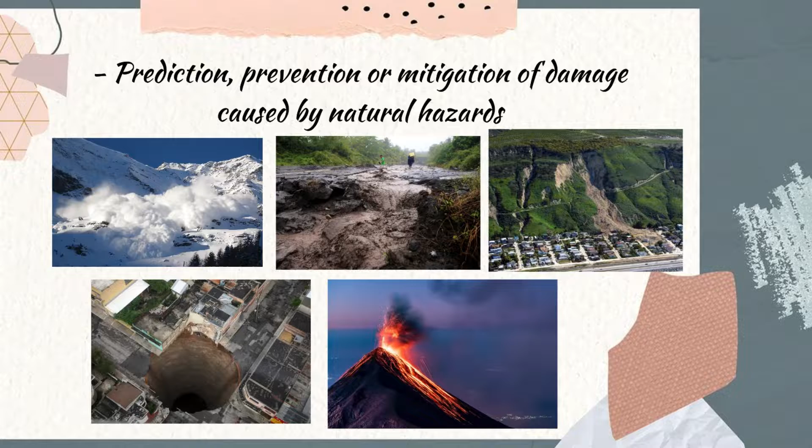Hi guys, my name is Aiman Haki, and in this video I would like to discuss the topic of geotechnics and transportation. Let's look at the definition of geotechnics. Geotechnics is the application of scientific methods and engineering principles to the acquisition, interpretation, and use of knowledge of materials of the Earth's crust for the solution of engineering problems and design of engineering works. It is the applied science of predicting the behavior of the Earth. Geotechnics embraces soil mechanics, rock mechanics, and aspects of geology, geophysics, hydrology, and related sciences. Example applications include prediction, prevention, or mitigation of damage caused by natural hazards such as avalanches, mudflows, landslides, rockslides, sinkholes, and volcanic eruptions. Now let's look at the assignment question.

The question asks to discuss issues of civil engineering related to geological, geotechnical, and transportation engineering in tropical climate. First, the geological and geotechnical aspect: geotechnical infrastructure is extensively used for transport and flood defenses. Asset values are significant, with failures causing disruption alongside potentially significant injury, death, and financial consequences. Changing climate alters environmental load on such infrastructure. While well-known impacts like sea level rise affect geotechnical infrastructure, other factors also have impact, such as increasing temperature causing soil drying, increasing mean rainfall causing reduction in soil suctions, and increasing intense precipitation causing soil erosion, flooding, and hydromechanical failure.

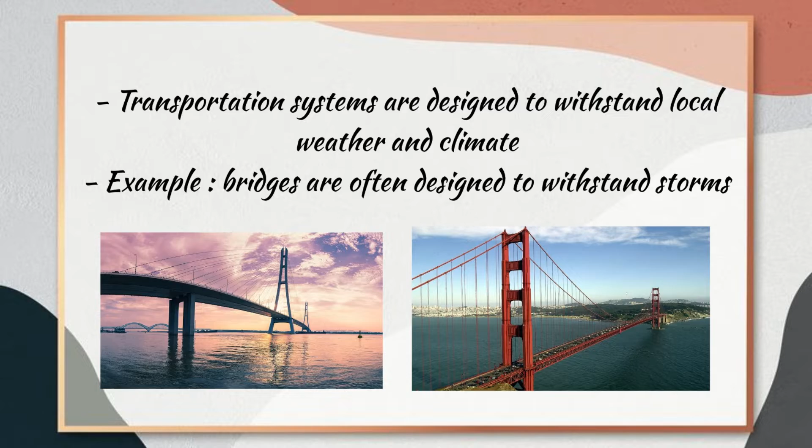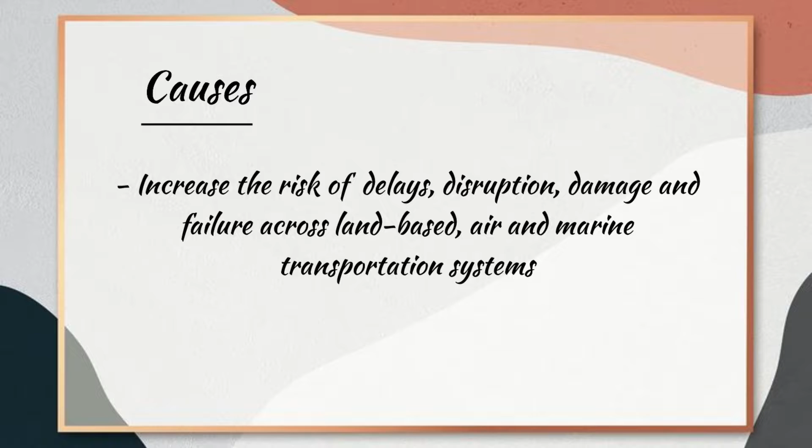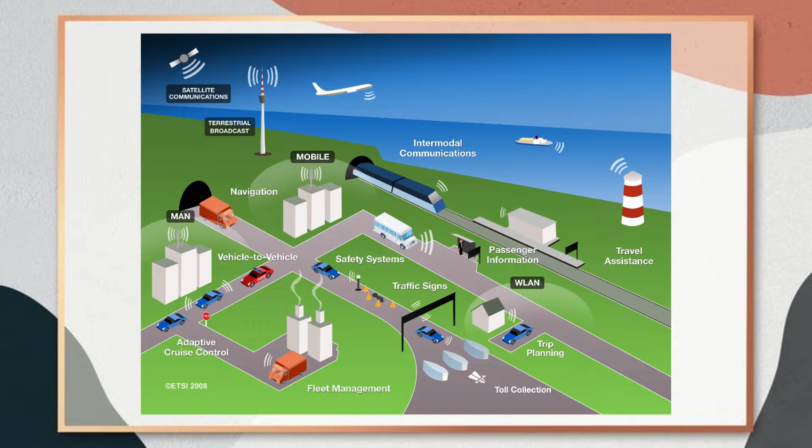Next is transportation. Transportation systems are designed to withstand local weather and climate. Engineers typically refer to historical records of climate, especially extreme weather events, when designing transportation systems. For example, bridges are often designed to withstand storms with a probability of occurring only once or twice every 100 years. However, due to climate change, historical climate is no longer a reliable predictor of future risks. Climate change is projected to increase the frequency and intensity of extreme weather events—heat waves will likely be more severe, sea level rise could amplify storm surge in coastal areas, and precipitation will likely be more intense. These changes could increase risk of delays, disruptions, damage, and failure across land-based, air, and marine transportation systems. Most transportation infrastructure being built now is expected to last 50 years or longer, so it's important to understand how future climate might affect this investment in coming decades. That's all for geotechnics and transportation.

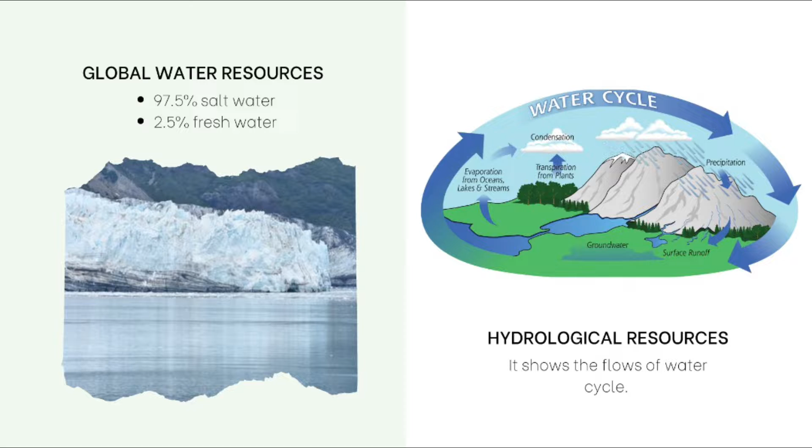Next, the hydrological cycle shows us the flow of water such as precipitation, condensation, evaporation, and transpiration. Third, watershed: it receives rainfall, and by means of gravity and infiltration, water is spread throughout the watershed area and flows out to sea. During its lifetime in the watershed, water is fully utilized for life and human necessity, and sometimes it gets contaminated, causing pollution.

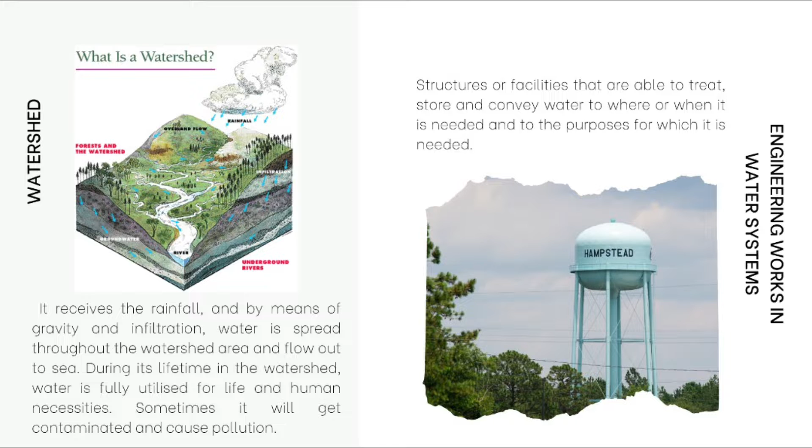Lastly, engineering works in water systems: structures or facilities that are able to treat, store, and convey water to where or when it is needed, and for the purpose it is needed. There are two types of water resources systems: water use systems and water control systems. In this topic, we also learn about coastal engineering, including coastal zones—backshore, nearshore, and offshore—and coastal hydrodynamics.

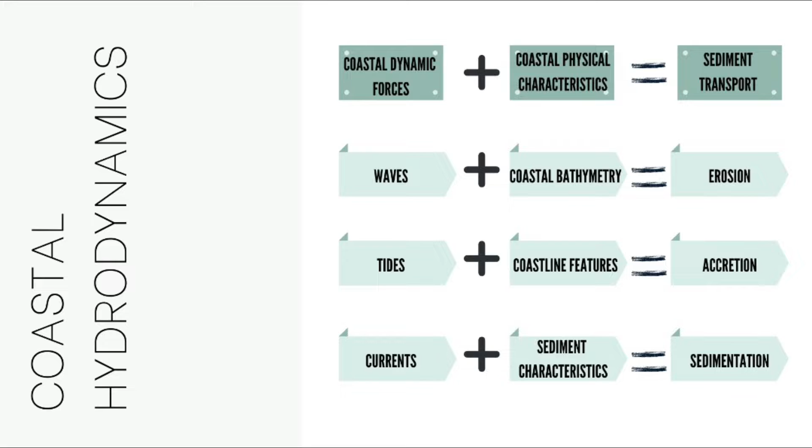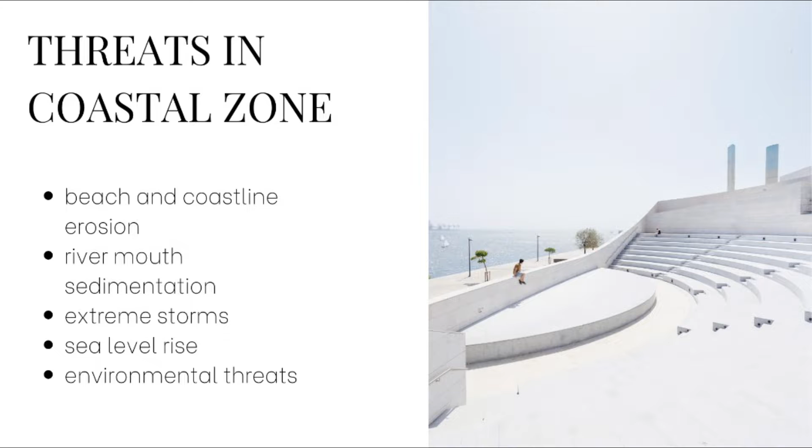Coastal hydrodynamics has been mainly concerned with coastal protection from wave, tides, and current for erosion, accretion, and sedimentation. We learn about threats in coastal zones such as beach and coastline erosion, river mouth sedimentation, extreme storm, sea level rise, and environmental threat. At the end of our lecture, we have an assignment.

So I will explain briefly about the assignment. First question, we need to explain how a simple action can give a big impact to the environment.

Second question, we need to give one human activity like clearing forests that can cause problems in watershed. Third, the question asks us the person in charge for the construction and their responsibility, such as dam owner.

Fourth question, we need to explain more about coastal forces and coastal features. Lastly, the question asks the Malaysian public, what can we do to reduce water problems?

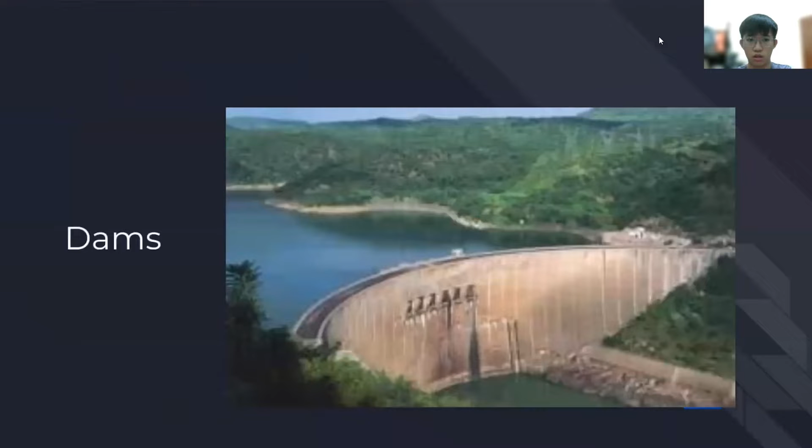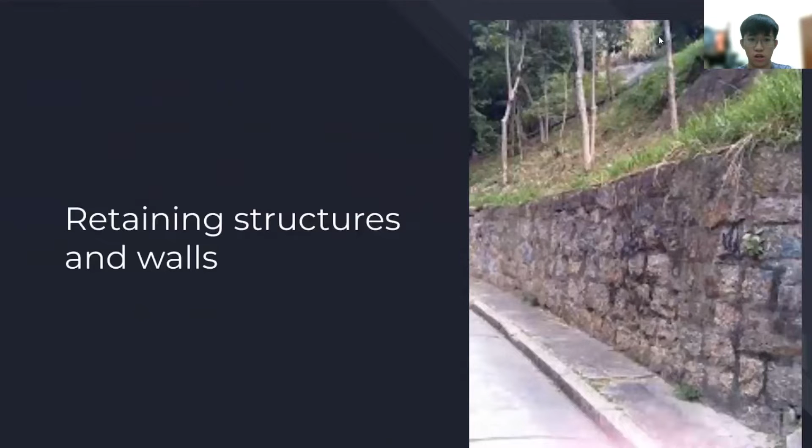In my session, I will explain about structure and material. There are 11 types of civil structure: buildings, bridge, dams, earthworks and foundations, offshore structure and pipelines, power station, railways, retaining structures and walls, road and tunnels, waterways and reservoirs, wastewater infrastructures.

Next is the engineering project value chain. First is market intelligence and concept definition. The following is engineering design, procurement, project management, fabrication, installation and commissioning, and operation, maintenance, and decommissioning.

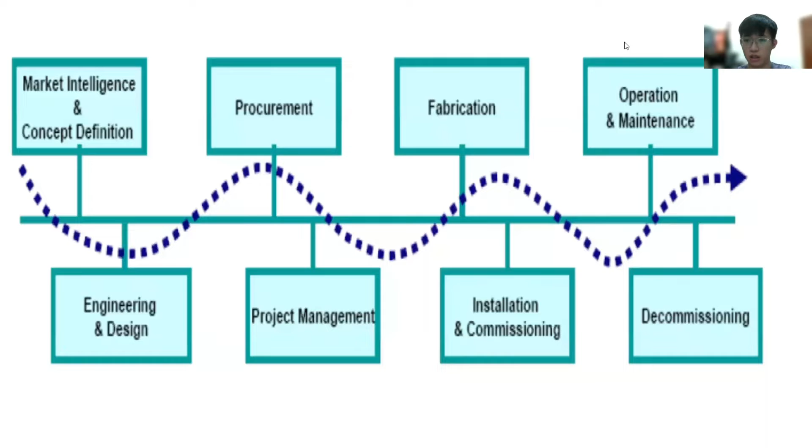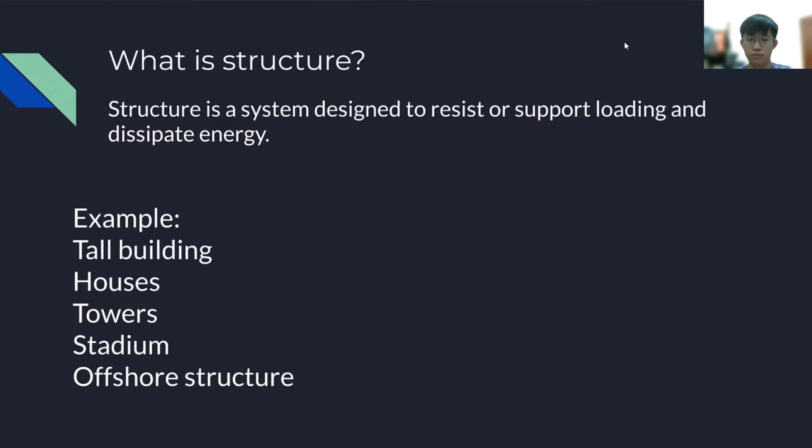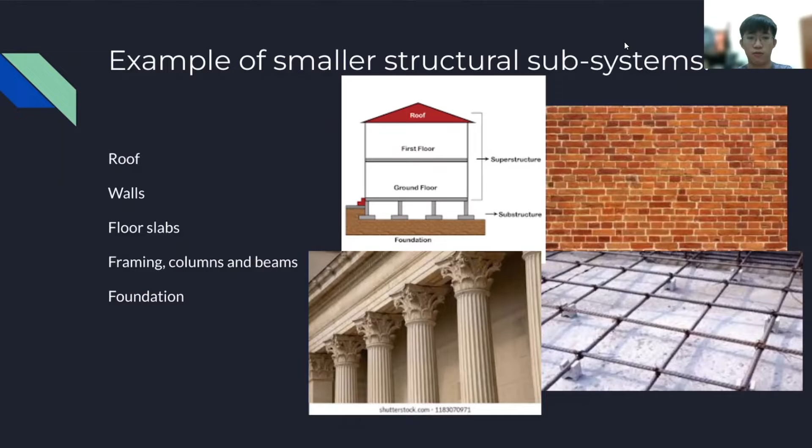Structural engineering. What is structural engineering? Structure is a system designed to resist or support loading and dissipate energy. Examples like tall building, house, tower, stadium, and offshore structure. The example of smaller structural subsystems are roof, wall, floor slab, framing, column and beam, and then foundation.

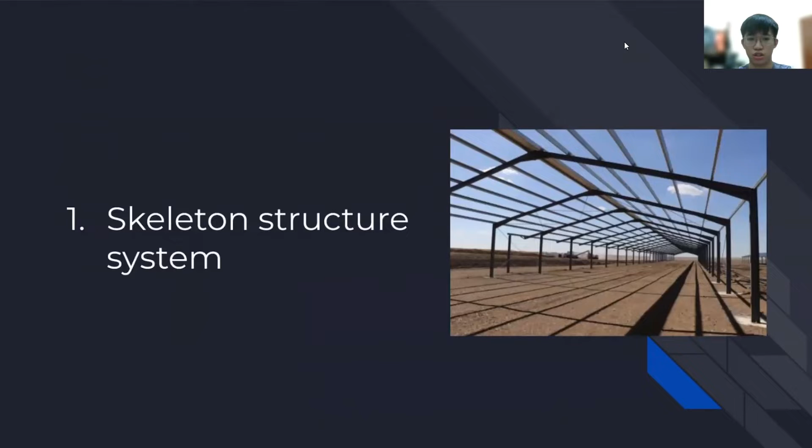There are 4 types of structural system. First is skeleton structure system. Second, shell system. Third, load bearing system. Fourth is tensile and cable system.

Civil engineering material. First one is cement and concrete. Second is reinforcing and structural steel. Third is timber. Fourth is masonry brick. And fifth is composite material.

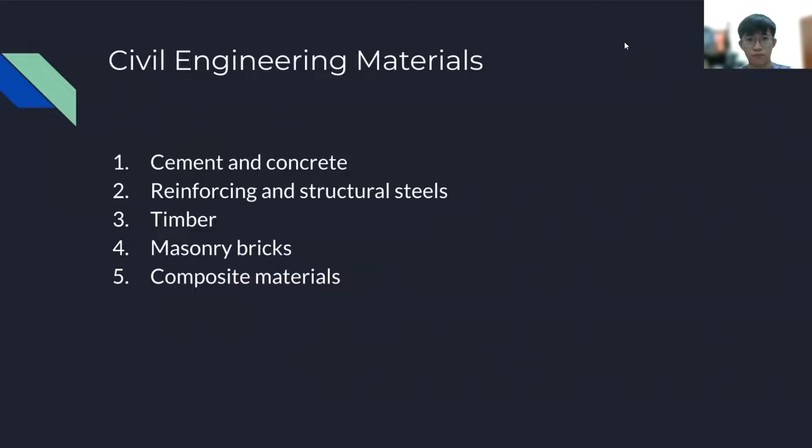The assignment required us to find a steel or concrete building structure of 3-story height or higher of our choice in our local town, and prepare a report about the building structure covering the following items.

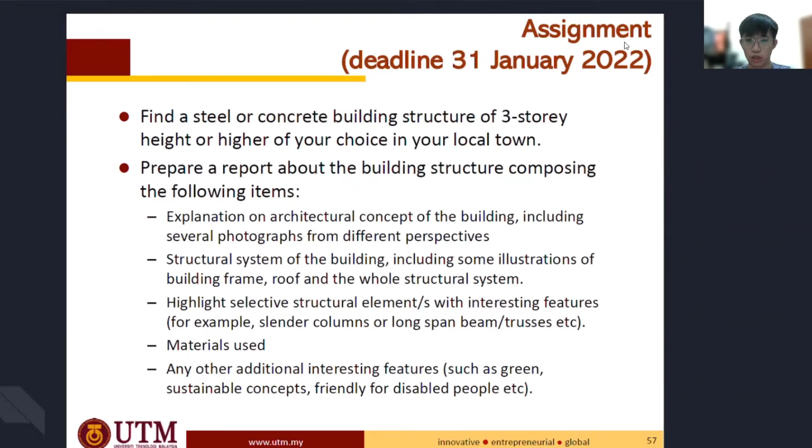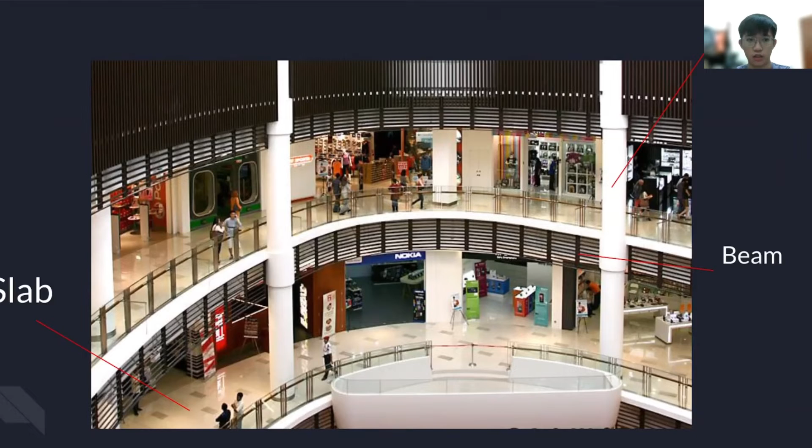So we chose Paradigm Mall as our assignment location. The following is the beam, the column, and the slab. The material used is steel, cement, brick, aluminum, and wood.

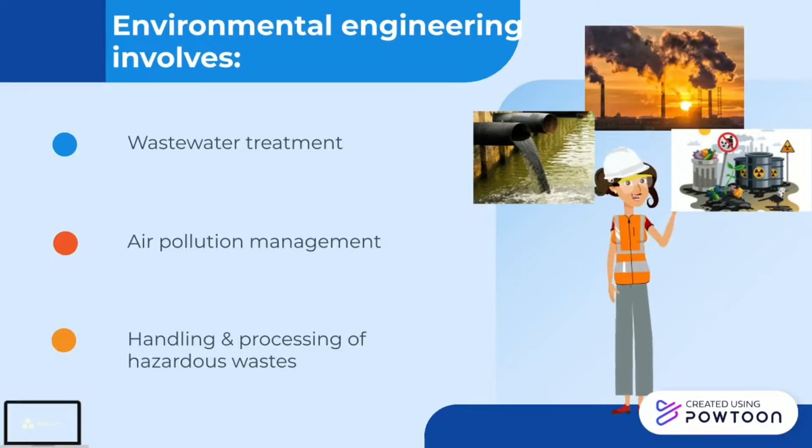Hi, my name is Ain Ashikin and I will proceed with assignment 4, which is Water and Environmental Engineering. Environmental engineering involves wastewater treatment, air pollution management, and handling and processing of hazardous waste. As environmental engineers, we need to ensure that societal development and the use of water, land, and air resources are sustainable to everyone.

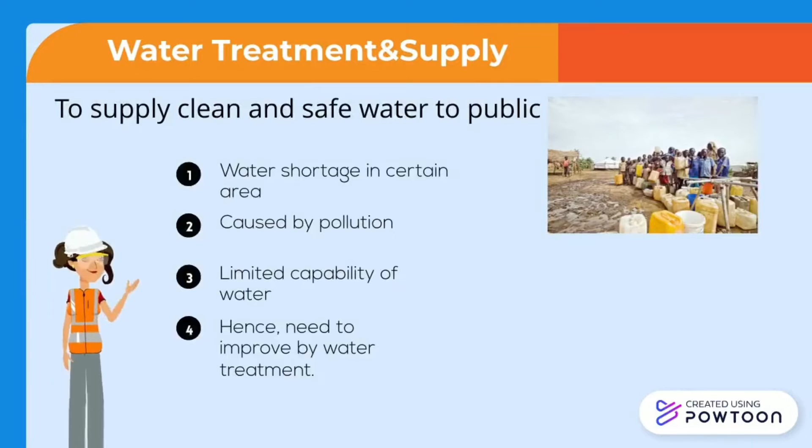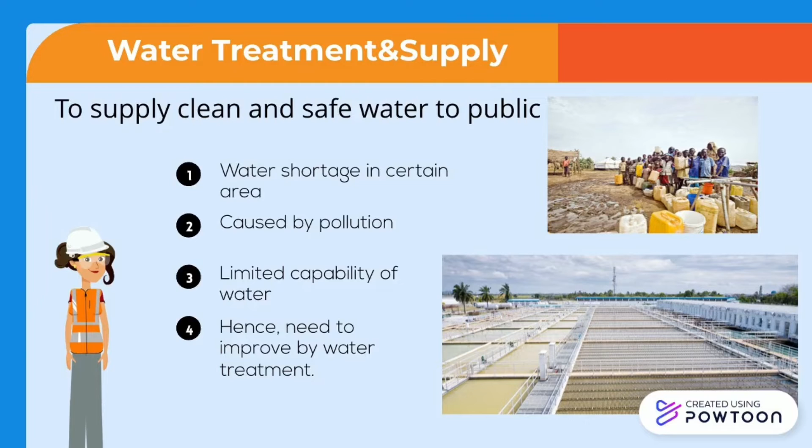So there are several fields in environmental engineering. I will start with water treatment and supply. The purpose of water treatment and supply is to supply clean and safe water to the public. Sometimes water shortage happens in certain areas caused by pollution. Hence, with the field of water treatment and supply, we can improve water by water treatment.

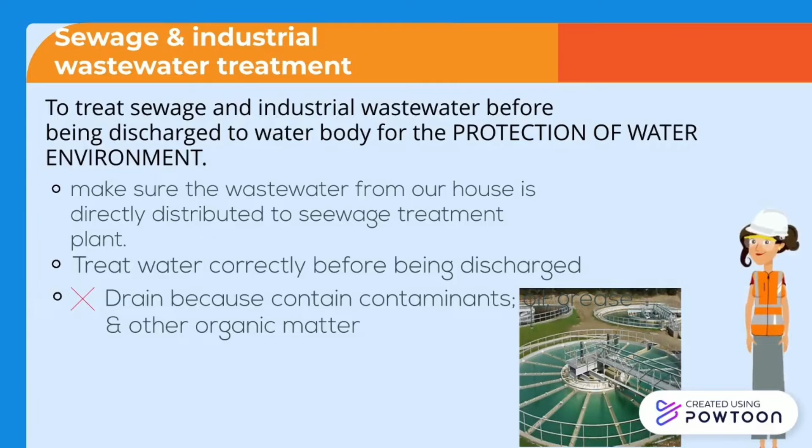The next one is sewage and industrial wastewater treatment. The purpose of this is to treat sewage and industrial wastewater before being discharged to water bodies for the protection of water environment. We are responsible to make sure the wastewater from our house is directly distributed to the sewage treatment plant. This is to treat water correctly before being discharged.

Industrial and hazardous water treatment is to manage non-liquid industrial and hazardous waste. Next, water quality management, this is to protect and preserve the quality of water bodies.

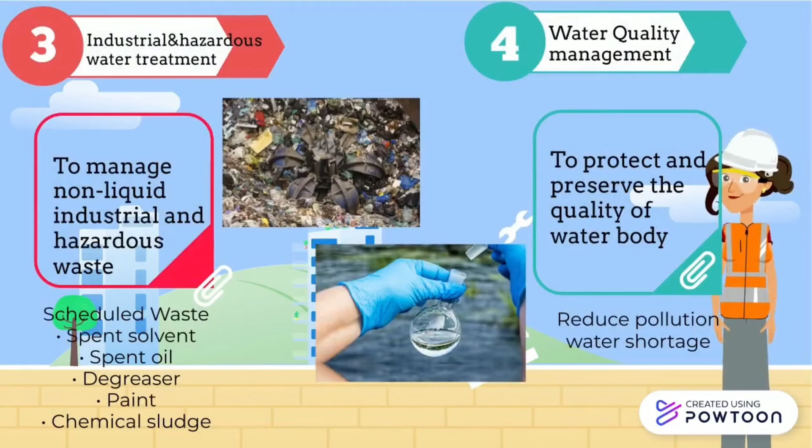Next, air and noise pollution control. This is to protect and preserve the air quality and noise level. Next, solid waste management, this is to manage the solid waste generated by public, commercial area, and industry.

And the last one is environmental management, activities directed to maintain and improve the state of environmental resources that are affected by human activities.

Then I will proceed with assignment 4, which is the trendline curve of water and energy family consumption in 2021. So for the family water consumption, we need to calculate it in meter cube per person per day. So we just have to collect all the bills for electricity and water and then start calculating everything.

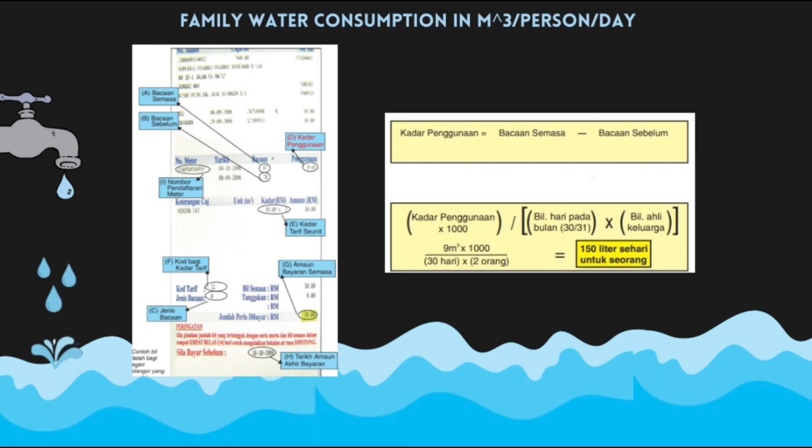For example, take the kadar penggunaan at the water and electricity bill and then just divide by total days and multiply with total persons in the house. So this is the example calculation for the family water consumption.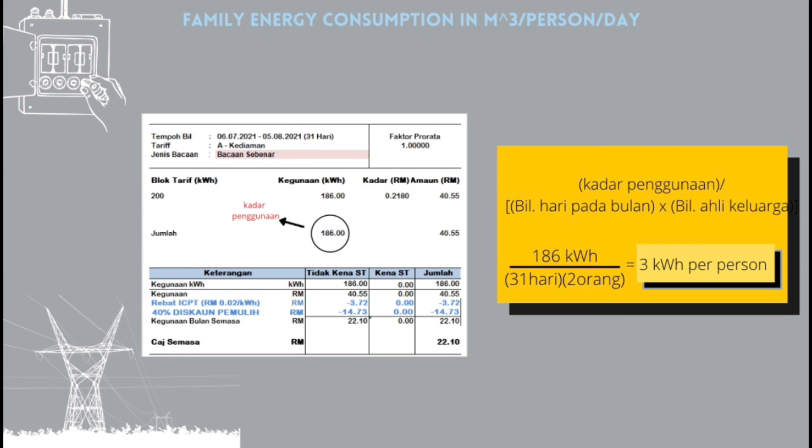And then for the family energy consumption, it's the same thing. We just look at the kadar penggunaan and then simply divide by days and multiply with persons in the house. This is the example of the water and energy usage trendline curve that I calculated for 2021.